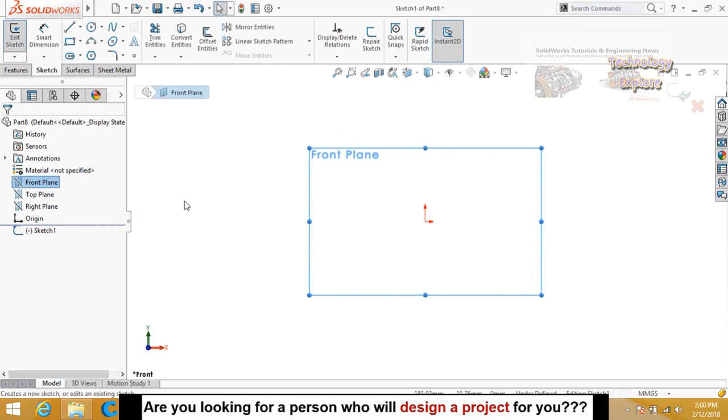Let's start. First command in the Surfaces tab, we have Extruded Surface. It works quite similar to the Features Extruded Boss Base command. So for using the Extruded Surface command, we have to draw a sketch on the front plane or any other plane. This sketch could be open or closed.

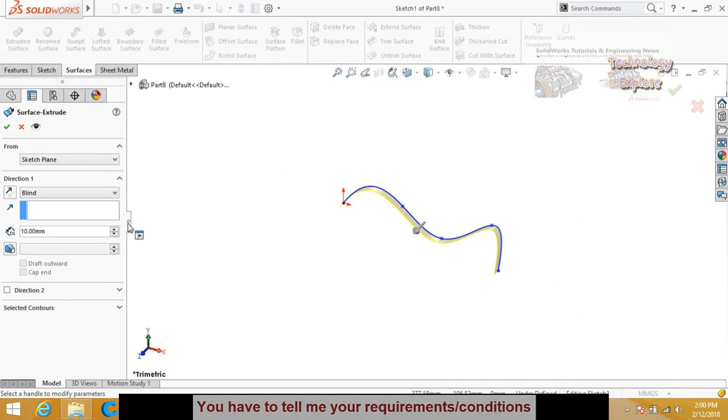So let's draw a spline first and let me show you how it works. Draw this type of spline, and then go to the Surfaces tab and select Extruded Surface. Now you can see how this surface is going to be extruded. These are the options for extrusion length and surface thickness, etc. This is the draft, and this is for direction 2. When you press OK, this command will be applied.

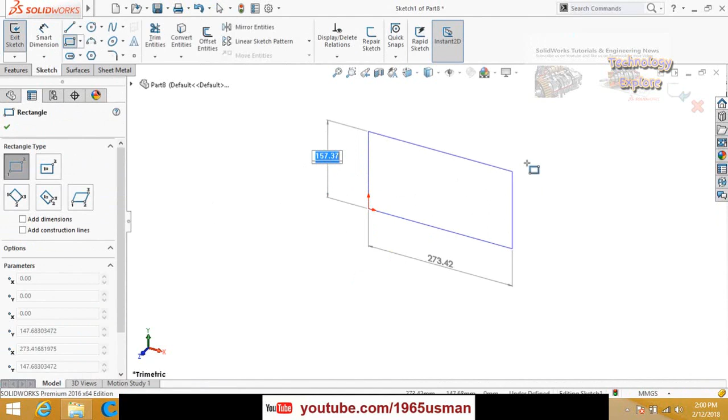So let me draw another sketch. This is a rectangle, and then go to the Surfaces tab and select Extruded Surface. You can see here how this rectangle is going to be extruded in the Surfaces tab.

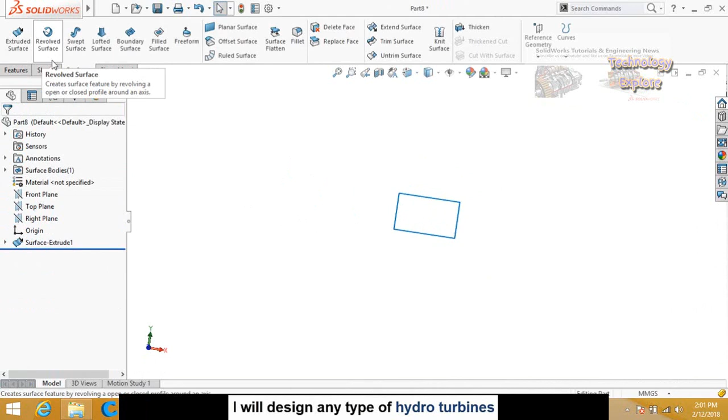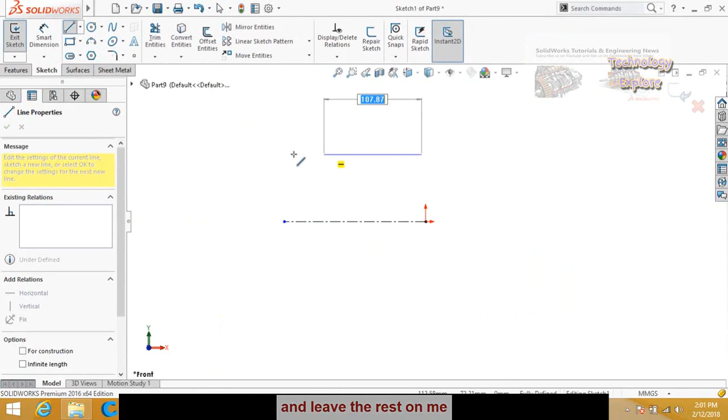Then we have the Revolved Surface command here. For that, let's start from a new part again and sketch on the front plane. Draw a center line and start it from the origin. Now draw another line somewhere here, then press escape.

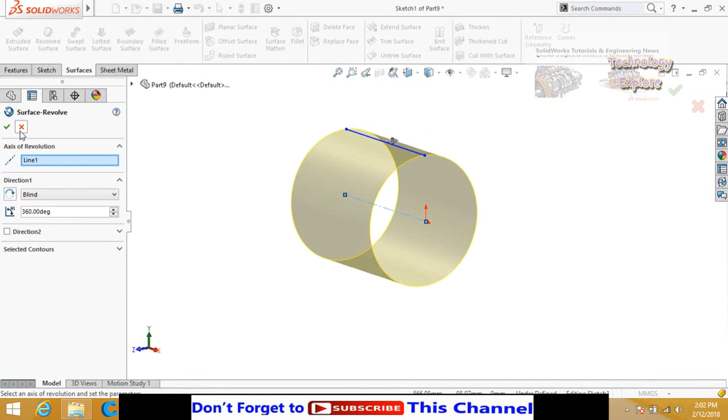Now go to the Surfaces tab and select Revolved Surface. Now you can see we are able to create a pipe by using these two simple lines. Here are the options for a revolved surface. When you press OK, this command will be applied. So see.

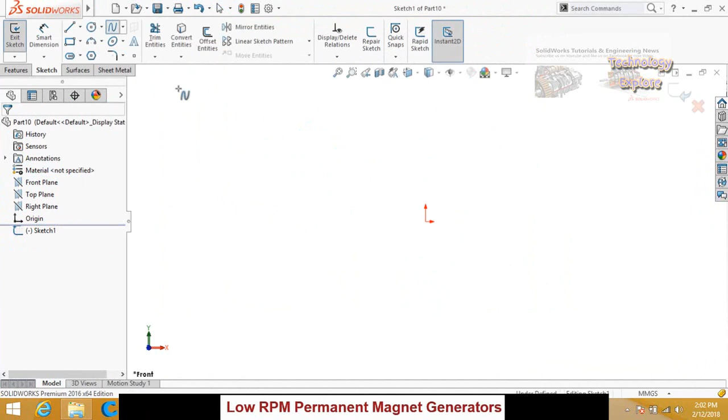Then we have the Swept Surface command. We need at least 2 sketches. So start from a new part again. Now draw a sketch on the front plane and draw an ellipse on this plane, like this, and then press this button to save and exit from sketch mode.

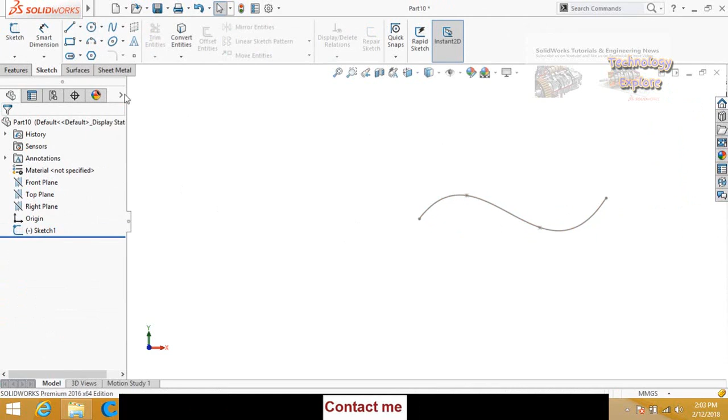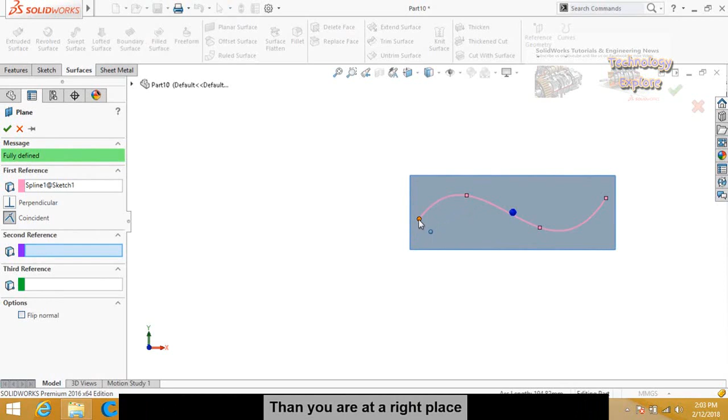As I told you, to use the Swept Boss Base command, we need at least 2 sketches. This spline is our first sketch, and for another sketch we have to create a new plane. For that, go to the Features tab or Surfaces tab and click on Reference Geometry, then select Plane. Here we need to give the system two reference points. This spline is our first reference, and this point is the second reference. Click on this point. Now you can see our new plane is fully defined, and press OK to create this plane.

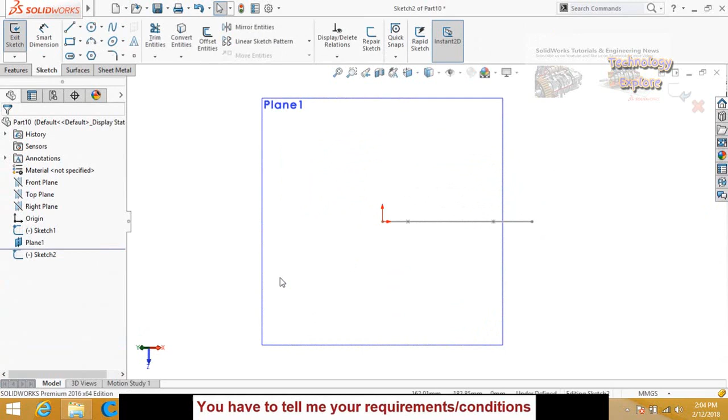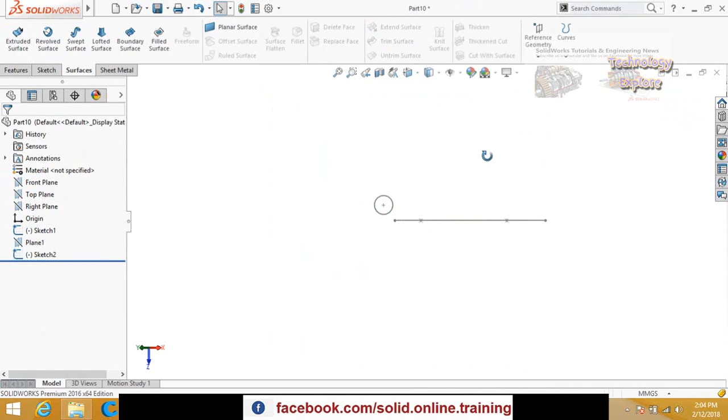Now sketch on this new Plane 1, make it normal to view, and draw a circle like this. Now press escape or OK. Then press this button to save and exit from sketch mode. So hide this Plane 1. Now go to the Surfaces tab and select the Swept Surface command.

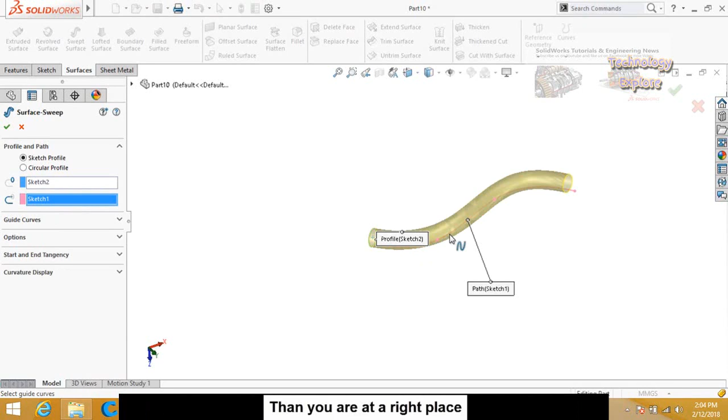So this is the profile and this is the path. This spline is our path and this circle is our profile. Select the circle and then the spline. So you can see here how we used the Swept Surface command.

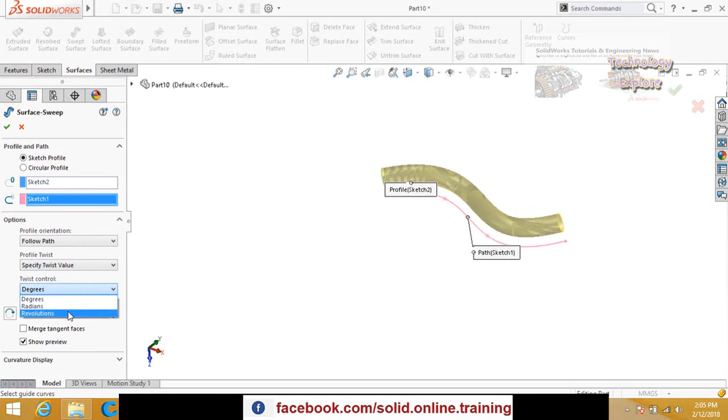Here is the guide curve option and the rest of the options. If you want to twist the profile along the path, drop down these options to Profile Twist, then specify the twist value from here. Select degrees, revolutions, or your preferred option. I'm going to select revolutions and type the number of revolutions. Let's type 50.

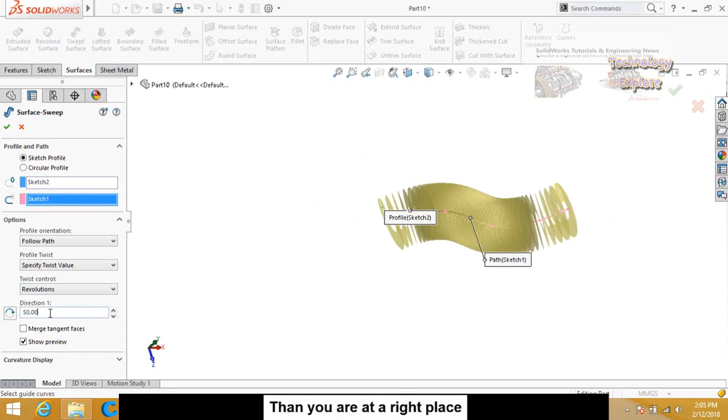So here you can see again, I changed the number of revolutions to 50. So this is how our Swept Boss Base or Swept Surface command works.

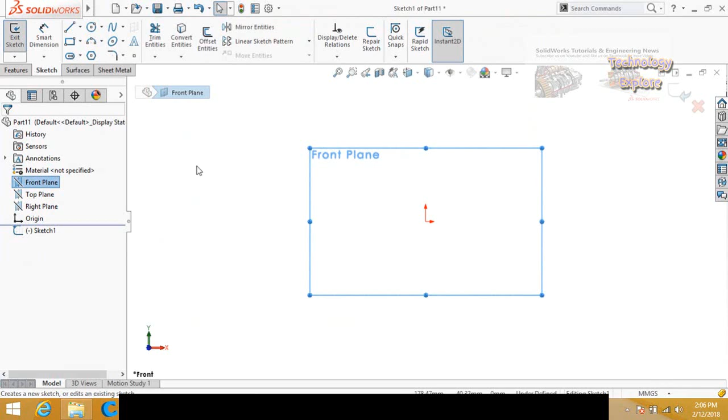Then we have Lofted Surface. For lofted surface, we also need two sketches on different planes. Let's start from a new part, then sketch on the front plane. Draw some sketch like a circle, and press this button to save and exit from sketch mode.

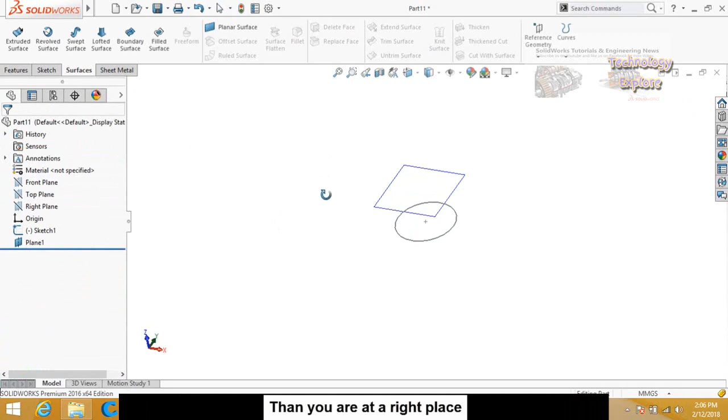Then we have to create another sketch somewhere here. So create a new plane by using Reference Geometry. Drop down these options and select the front plane as the first reference, then type the distance as 50 millimeters and press OK. Now sketch on this Plane 1.

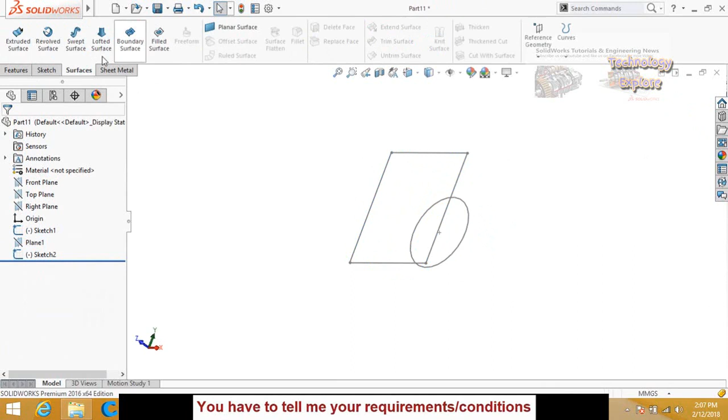Make it normal to view and draw a rectangle. Now press this button again to save and exit from sketch mode. Then hide this Plane 1. Now go to the Surfaces tab and select the Lofted Surface command. Select two profiles: first this circle and then this rectangle. So here you can see how the Lofted Surface command works.

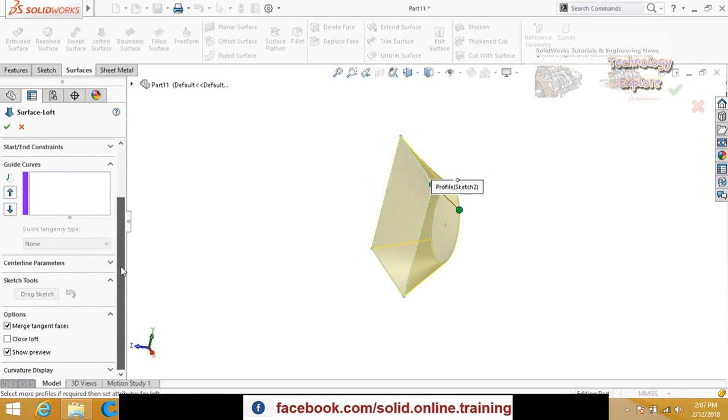Press the OK button to apply this command, and these are the rest of the options for this command.

After lofted surface, we have the boundary surface command. We have another important feature in SolidWorks where whenever you hover your mouse over any command, a short text will appear describing what the command does.

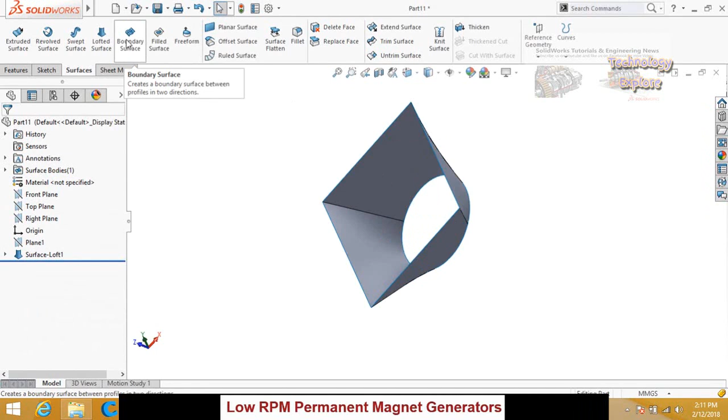Here you can see that the boundary surface command will create a boundary. Let's see how. Select it, then in direction 1 select this edge, then this edge. See how the boundary has been created for these edges.

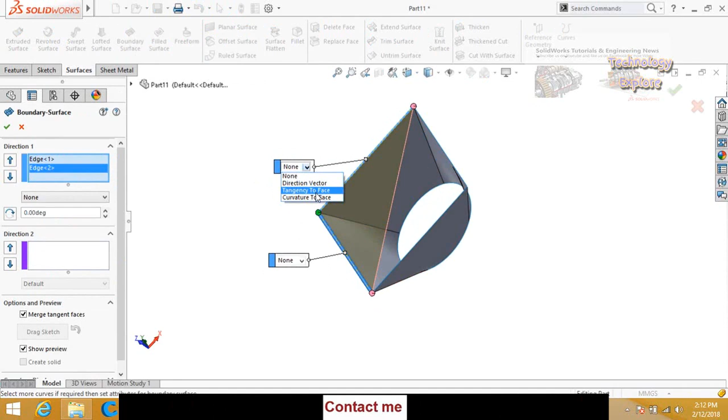So here is the profile. Select one of the options and see what happens. For this, select Tangency To Face. Here is the direction.

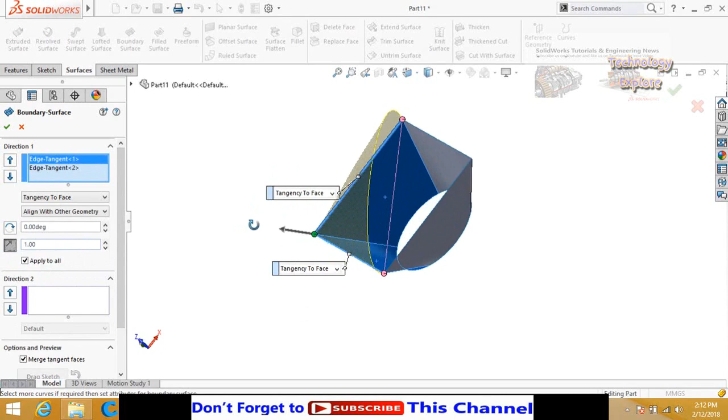For the direction of the second edge, select it from here and from here, then change the direction. Now you can see how we applied the boundary surface command. These are the rest of the options, and when you press OK, this command will be applied.

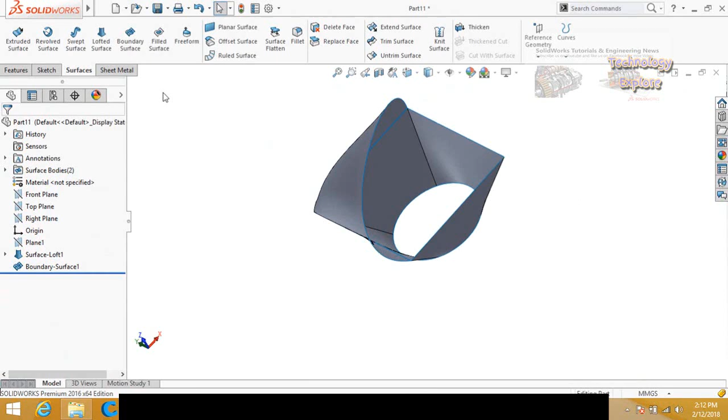Then we have the next command, filled surface. Let me show you how it works. As you can see, this circular edge is empty, and if you want to create a surface on this circular edge, this command will be used for that purpose.

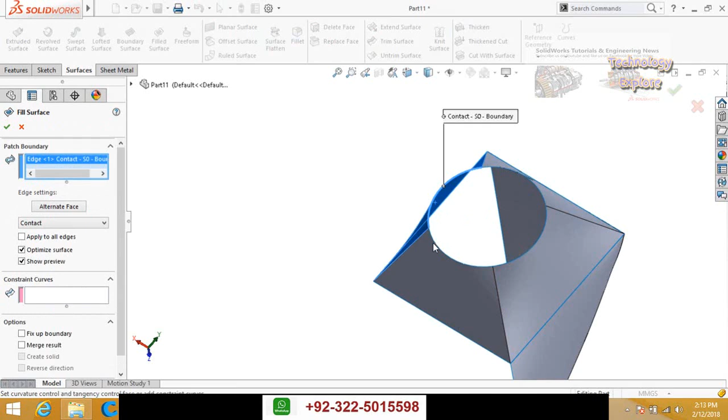Let's start. Click on it, then select this box and then this circular edge. See, we have created a surface, or filled the surface on this circular edge.

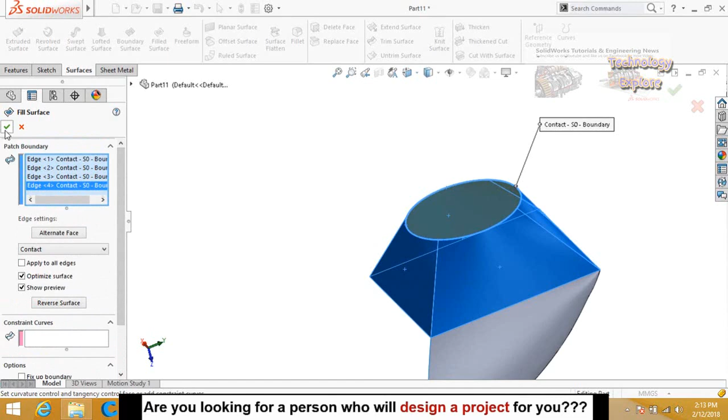Then we have the options here for this filled surface command. When you press OK, this command will be applied.

Then we have the freeform command, and as the word freeform itself implies, whenever you use this command, you will be able to freely form your surfaces. So select it.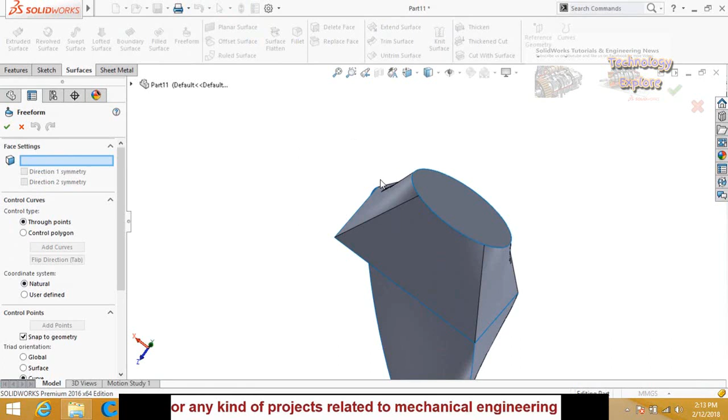First of all, in this box you have to tell the system the face for which you want to freely form.

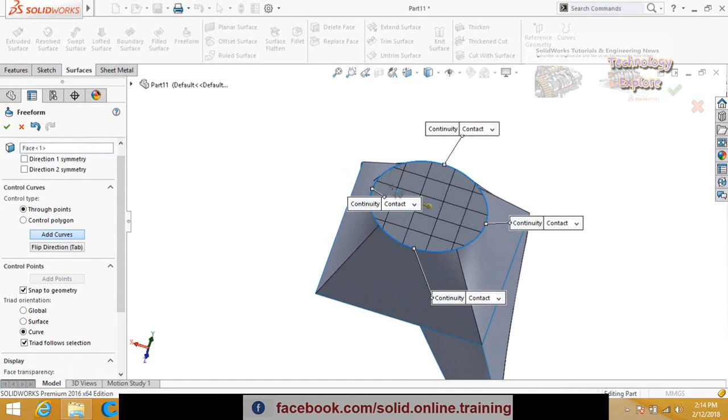Then we have these options like add curves. When you select add curves, you have to draw curves on the face for which you want to freely form your surface.

Then we have add points, so you can also tell the system by adding points to freely form your surfaces.

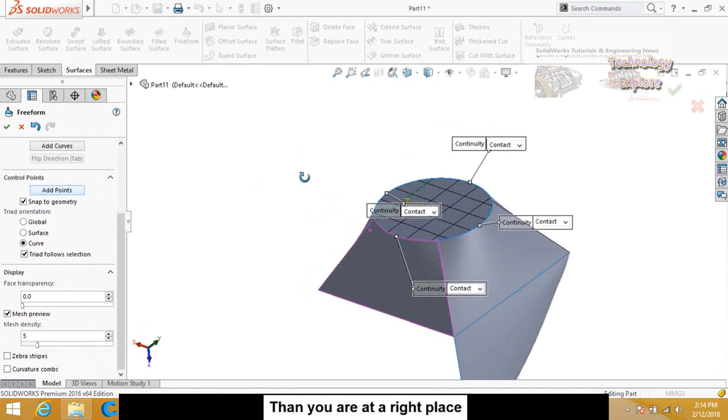Then we have the rest of these options. Let me show you: if you click and drag the point like this, your surface will be created in this way.

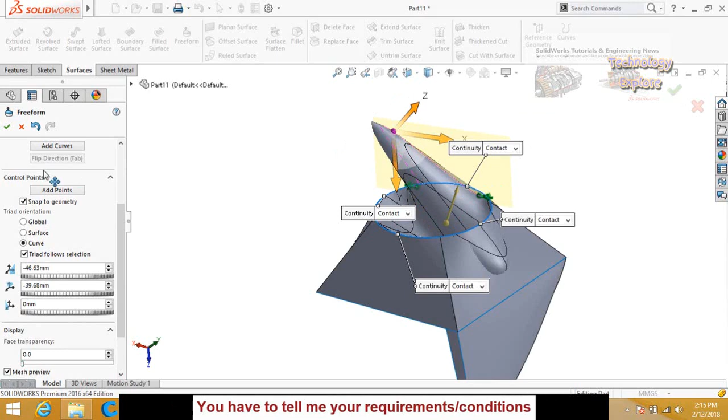My computer hardware is very slow, so I'm unable to explore this command very briefly. When you press OK, this command will be applied.

After freeform command, we have the offset surface command. For that, we have to start from a new part. The offset surface command works quite similar to the offset entities command in the sketch tab. Let's see how it works.

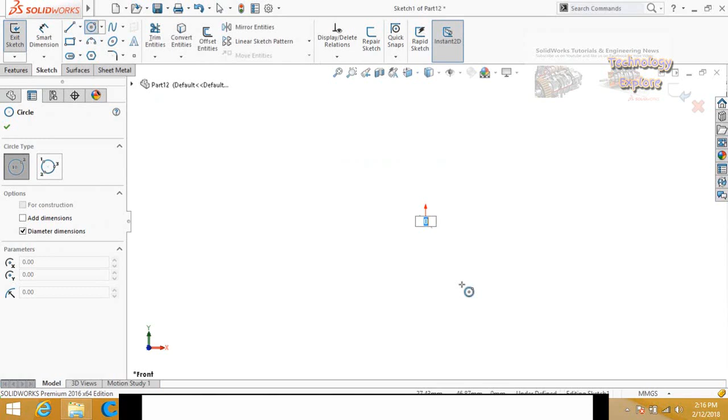Create a sketch on the front plane and draw a circle like this. Then go to the surfaces tab and use the extruded surface command.

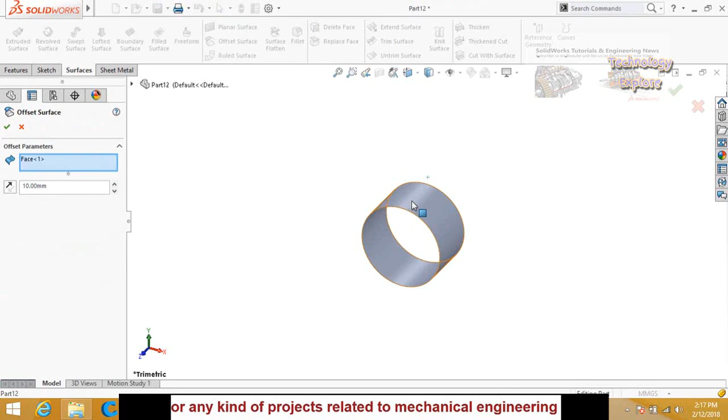Then select the offset surface command. Select this surface and see. This is the offset distance and the direction; you can increase and decrease it. When you press OK, this command will be applied like this.

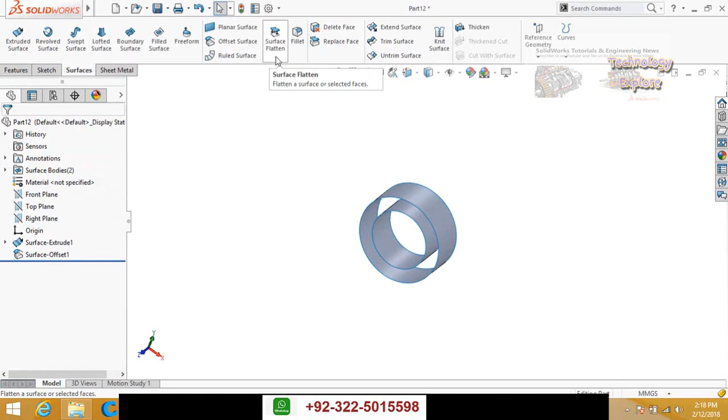After offset surfaces, we have another important command, surface flatten. Let's see how it works. For that, start from a new part. This command is used to flatten surfaces. Let's create a sketch on the front plane and draw an ellipse.

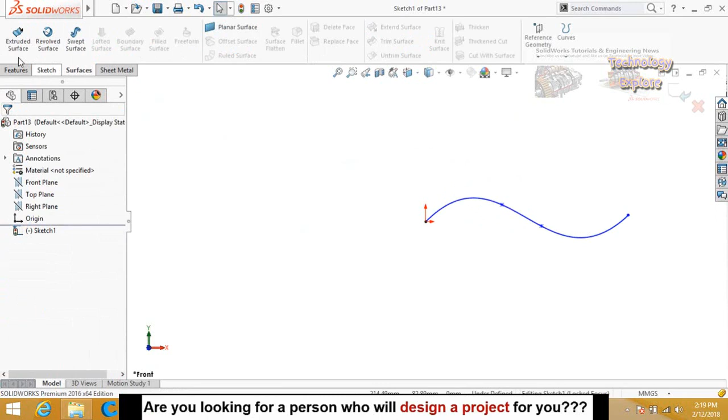Like this. Press the escape button, then go to the surfaces tab and select extruded surface. Extrude it and press OK to apply this command. Then use the surface flatten command.

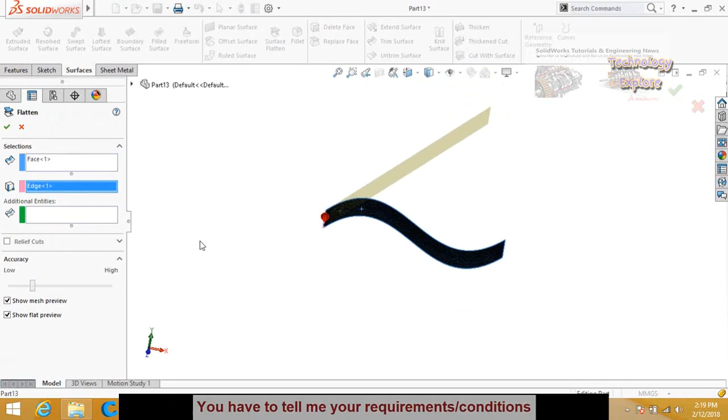From here select the surface, and here select the fixed face or edge. Select this edge and see how we are able to flatten the surface.

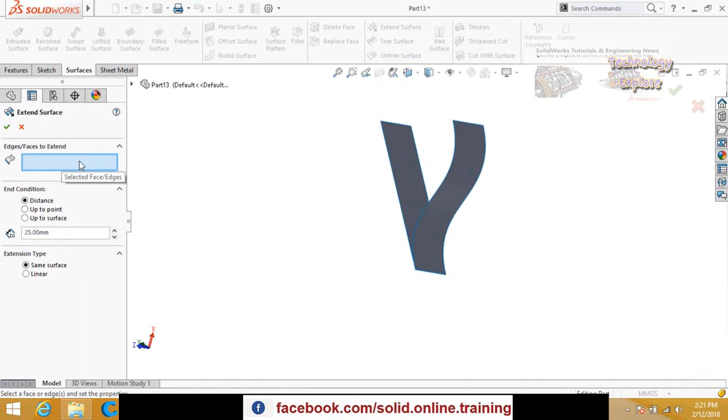After flatten surface, we have another important command, extend surface. This command is used to extend surfaces. Let's see how it works. Select it from here, and in this box we have to tell the system the edges we are going to extend.

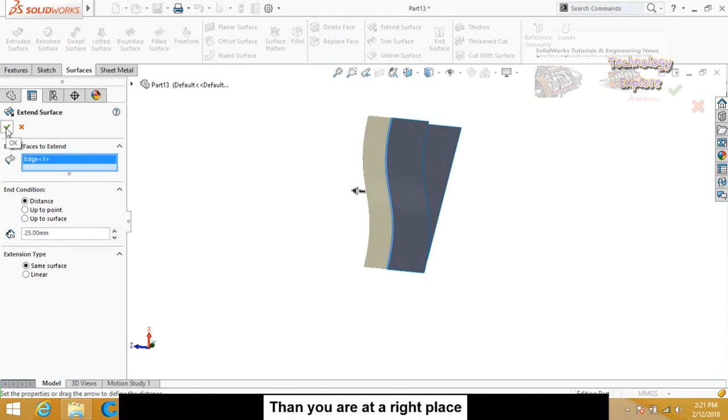Select this edge, and then we have the options here: distance and the rest of the options, up to point, up to surface, and you can choose your own desired option. Press OK to apply this command.

After extend surface, we have another important command, thicken. Select it from here. Basically this command is used to thicken your surfaces. Let me show you how it works.

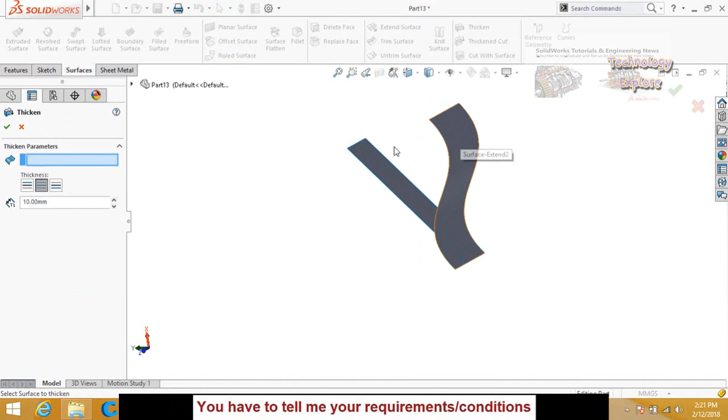Let me select this surface. Click on this box and then select this surface. See how it is working.

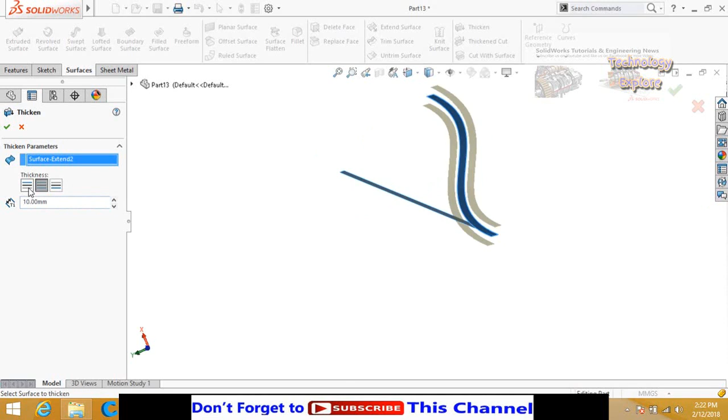Here are the options like thick distance. At the moment it is 10 millimeters, and you can increase or decrease this. These are the direction options.

So this is mid plane. Press OK to apply this command. This is how the thicken surface command works.